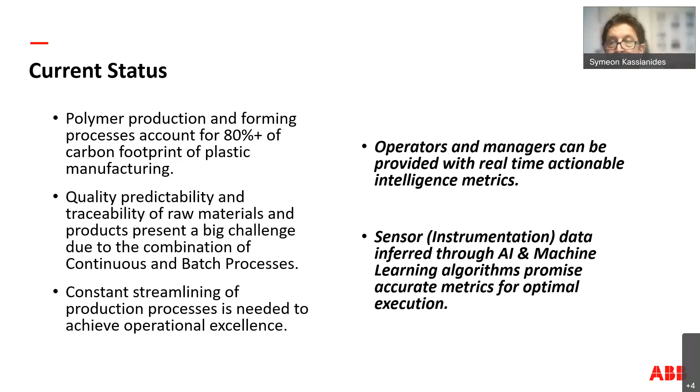A second challenge comes from the fact that polymer production can be a combination of continuous and batch processes, and this makes quality predictability and raw material tracking and traceability a big challenge, which in turn makes achieving and maintaining operational excellence difficult. However, as we will show, it is possible to provide real-time actionable information that can lead to sustainable operational excellence. I'll now turn it on to Symon, and Symon, please, I'll go on mute and you can continue from here.

Thank you, Symeon. So let us now look at the challenges that face the polymer industry. As we said, this is a continuous process with some batch aspects. The real-time tracking of material, both in terms of what is in the product and where it is now within the process as it moves along the equipment, followed by the quality being tracked in real time.

The issue being, if we detect a problem early on in the process, such as in reactor 2, in 2 hours time, where is it now? It will be somewhere along the production stream, but where? The next issue is detailed product history, which covers what is in the product and the details of when and where it was made during the process.

And then we have the predictability of quality during grade transitions. Obviously, this helps speed up the transitions between different grades and reduce the production of off-spec material or transitional material.

We then can move into the time characteristics. Because of the nature of the process, it takes hours to go through the reactors and then hours to produce enough to fill a batch. So a batch might typically take 8 hours or more.

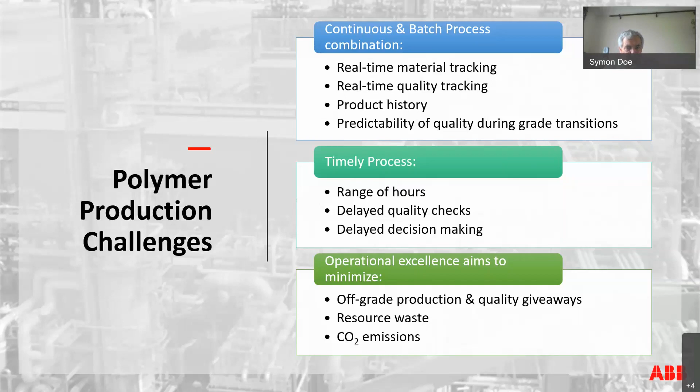Current solutions do not directly address the challenges outlined earlier. Solutions can be created but require excessive custom development. The exact nature of this varies depending on the chosen platform.

A classic problem with quality testing is that the results are delayed while the lab performs the tests, and sometimes by an hour or more, as we illustrated earlier. And this impacts the decision-making process. As the bulk of the process is continuous, if a quality issue is detected at an early stage, there is no visibility of where the affected material is an hour, 2 hours, or 3 hours later.

The technology has grown out of knowledge and experience gained from projects executed over the last 18 years. The solution is not specific to polymers and can be applied to industries with similar process behavior. To make the technology easy to apply to different processes and working practices, it has been created using standard components that can be arranged to cover most requirements. Custom models can be easily added to handle specific requirements.

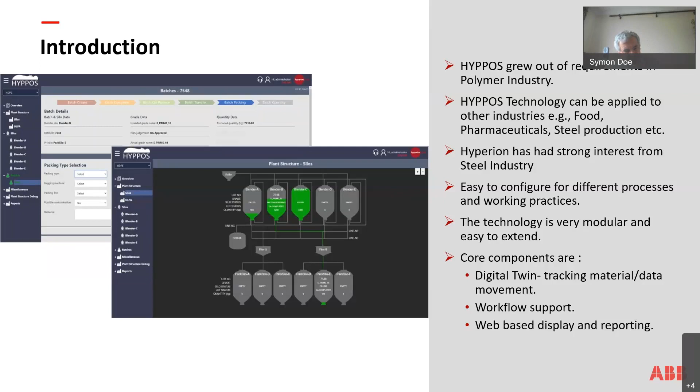The HYPPOS system is composed of 3 main modules, which are the digital twin, which tracks the material in the plant, the workflow, which automates procedures and background tasks, and finally the web-based displays and reporting.

So HYPPOS is positioned within Industry 4.0 as a deep tech decision support tool within the tactical management level. And it collects data from systems at the transactional management level, from the plant, controls values, etc. Feeds and receives data from systems at the strategical level, e.g. SAP, and coexists and interacts with other systems such as LIMS at the same level.

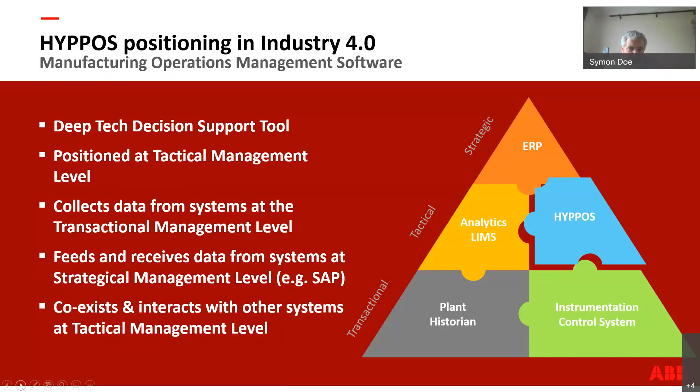We now look at each of the components of HYPPOS, starting with the digital twin. This replicates the main process equipment, delays, holdups, and material movements driven by measurements from the plant.

As the material moves through the process, it can be tagged with quality and other information as it passes instruments and sensors, so it carries that along with it.

The software maintains a detailed history of all movements of material between vessels and into the final product, allowing creation of detailed reports of how and when the product was made.

The digital twin is constructed from blocks that replicate the main equipment as shown in a PFD, and by then adding the live process value tags from the plant.

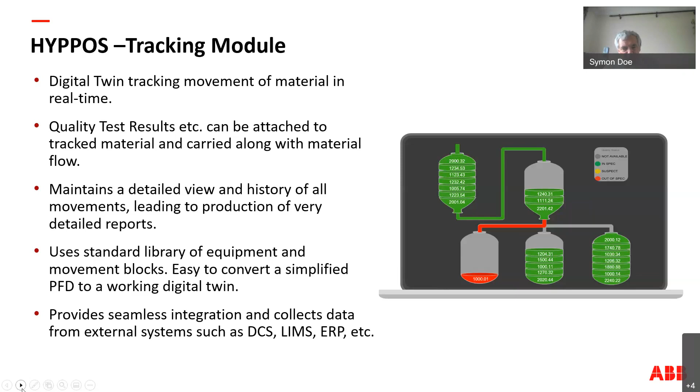The second active component is the workflow module. This implements the interactive workflows for standard operating procedures, as well as automating background monitoring tasks to detect and action specific events. The workflow typically executes a sequence of steps, transitioning to the next based on specific conditions.

When the workflow interacts with operators, the screens are only visible to the operators with specific roles, so nobody is distracted by something that's not relevant.

A real workflow, unlike the one illustrated, has more paths to handle non-standard operating situations, and typically these will require approval steps to allow the operation to proceed.

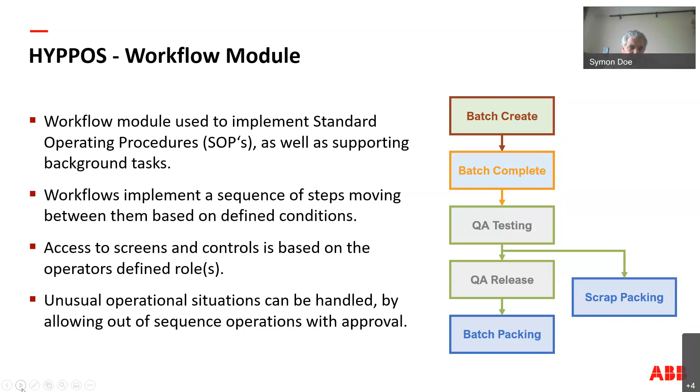The reporting module converts the collected information and presents it in meaningful forms for each role. The module includes 8 standard report groups, which can cover different time periods - daily, weekly, monthly, yearly, etc. - giving a total of 40 or more different reports. Additional reports can easily be added to cover any plant-specific requirements.

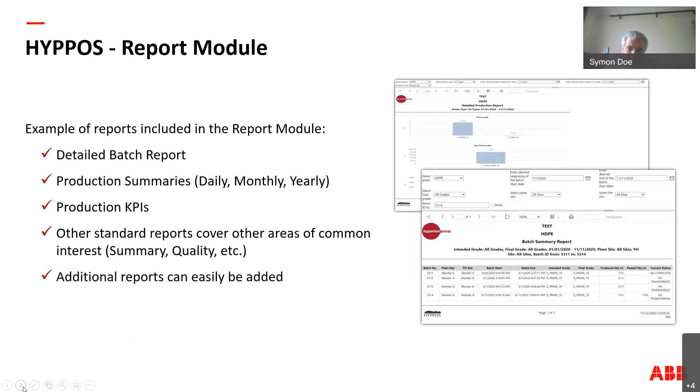The benefits of HYPPOS are that it collects data from multiple sources, extends it using the digital twin, and creates a single unified view of the process that can aid the decision-making process.

To summarize: it improves the decision-making process by giving visibility of critical information, concentrates fragmented data from multiple sources and provides a single overall view, improves collaboration and efficiency, improves product quality monitoring and plant operations visibility into raw material consumption, addresses regulatory concerns by providing traceability, and leads to higher yield in less time, leading to higher profit margins.

Which leads on to you, Symeon. Yep, thank you, Symon.

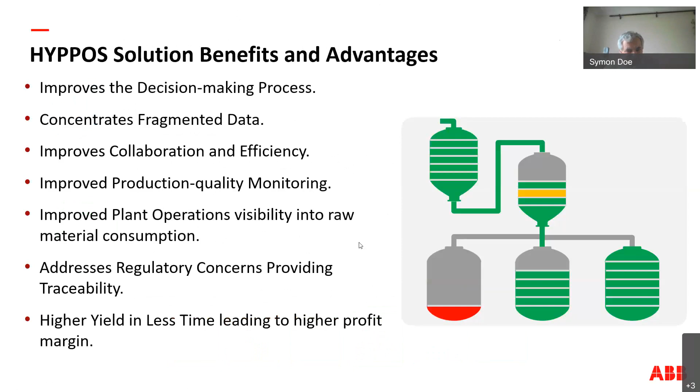Okay, so to summarize and bring all these points together in discussion, I think we're focusing on how digitalization can benefit polymer production. We've seen in practice that manufacturers can increase differentiation and competitiveness, and achieve significant efficiencies and cost reductions.

I would like to refer to a recently published report indicating benefits of up to 20% reduction in batch cycle and 40% reduction in product release time. Last but not least, digitalization can help plants achieve their sustainability targets.

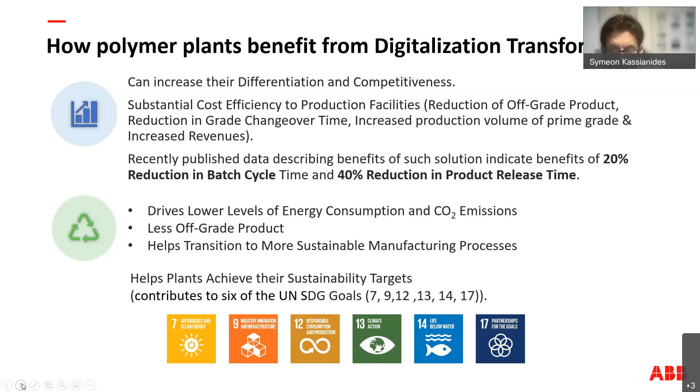We all like to look at numbers, so just as a teaser to get everybody thinking of the magnitude of the potential benefits of using technology such as this: in the event of recovering 1,000 tons of off-grade material at a cost of 1,500 euro per ton - and that might be an outdated number - the material cost saving would amount to 1.5 million euro per year. In a plant of 250 or 300,000 tons, you understand the impact of such efficiencies.

On top of that, we have carbon pricing, which is an additional benefit. The reduction of greenhouse gas emissions from improved operations can improve the ESG score and rating of the company.

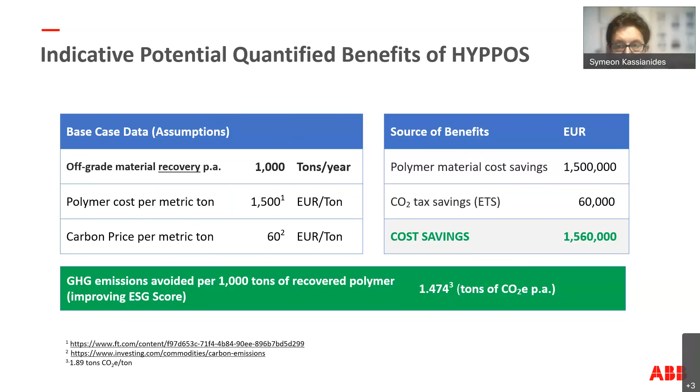With this, I will introduce and pass on to Nikos Perperis, the polypropylene production manager of Hellenic Petroleum, for his part of the presentation. Nikos, the floor is yours.

Can you hear me? Yes, we can hear you now. Okay. Sorry, but there was a problem with my connection. I hope that I was not...

Let me first introduce, to those who may not know, the group Hellenic Petroleum. Hellenic Petroleum is a dynamic group, the biggest in the country, having a leading position in the Greek energy sector, as well as in the greater area of Southeastern Europe.

The group's range of activities includes supply, refining, and trading of petroleum products, both in Greece and abroad, fuels marketing, petrochemicals production and trading, oil and gas exploration and production, power generation and natural gas, renewable energy sources, and provision of consulting and engineering services to projects related to hydrocarbons.

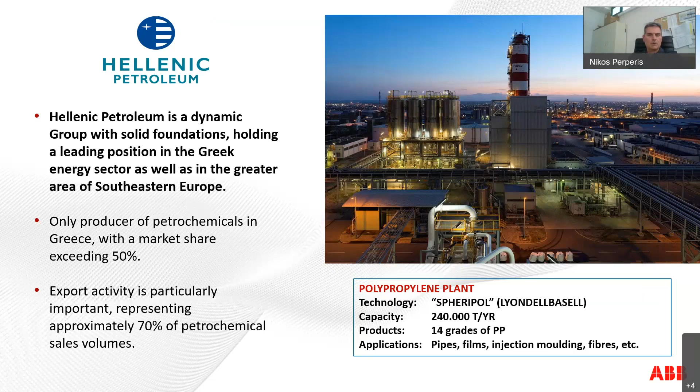As we all know and experience, the fourth industrial revolution has already invaded our lives and transformed businesses worldwide using the advantages of modern technology. HELPE, of course, as a leading company, could not stay away from this transformation and has adopted numerous actions that you see in the list shown in this page. Some of these actions are completed and already run, some are still in progress.

The Hyperion HYPPOS solution was piloted and has since been deployed at the polypropylene plant, and it is one of the main actions for the digital transformation of the polypropylene plant. Next page, please.

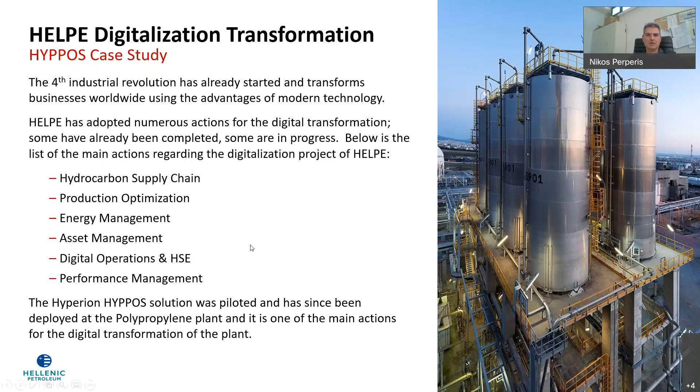The beta testing, installation, and launching partner. Hyperion selected HELPE as the launching partner for HYPPOS due to the high suitability of the Thessaloniki plant, the opportune geographical proximity, as well as the long and historically successful cooperation between the two organizations. Configuration and installation was completed 100% remotely, and this is very important for Hyperion, due to the COVID-19 pandemic outbreak. The beta testing was successfully completed between May and June 2020, 2 years ago.

Since July 2020, HYPPOS is connected to the real-time plant data management system, collecting data from the PP production line to track production batches in real time and produce the associated reports. But what is all this job for? Just show a bit the previous page, please, Symon.

Okay. As we can see in the lower right part of the page, the plant has one extruder line, 6 blenders, 4 bagging silos, and 23 silos dedicated to bulk product. Why is this so important? This is connected to the benefits of HYPPOS to our plant. Now we can go on with the next page, please.

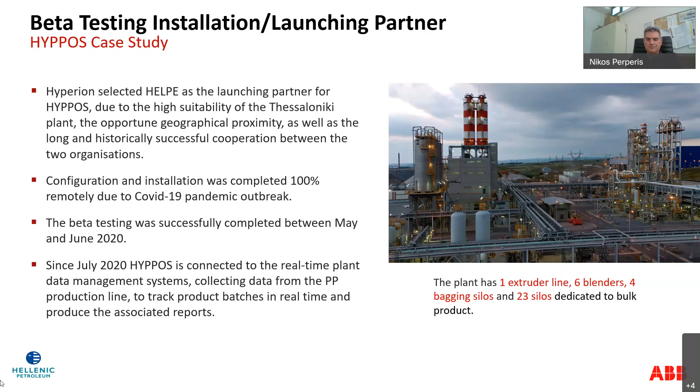Here we are at the benefits. We will see some of the benefits, although we will be able to see and detect them in the following pages. So let's explain first that the plant has 2 distinct separated areas, the reactors area and the area of the extruder and then the silos that we have seen before. In both areas, the process is continuous, but it is at the extruder area and after it that the separation of the batches takes place. So this is what was said before, that it is the integration between a continuous and a batch process. And this is the main benefit that we can have from HYPPOS.

So all continuous production history, reactor and extruder areas, the 2 areas that we have just said, is now associated with the final batch product in real time and available online. It offers a single consolidated source of information within a specific product batch, spanning across the full production cycle, continuous and batch. Through the provided material tracking, it enables the immediate troubleshooting of production issues and the investigation of any customer complaints and claims.

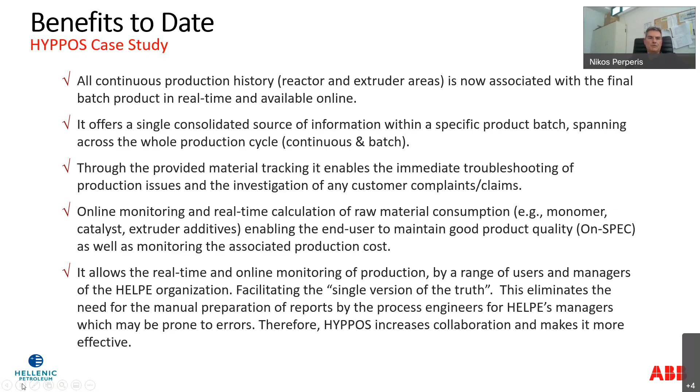Let's go on now to see the reporting. Here we can see some of the reports that HYPPOS can prepare for the plant. As a matter of fact, we have to tell that we are still developing HYPPOS, and every day we have a new idea. Every day with the colleagues in Hyperion, we can add new reports according to our needs and according to what we want to draw from the plant and from the system.

The first one that we see is the batch summary report, which is the most important, I would say, because we have all the details from the production of the batch. The same for the second one, the detailed batch report. The additive report, where we can see if all the additives to the extruder area have been added correctly, which is very important for the final quality of the product. So it eliminates off-spec product.

The grade daily report, quality reports, scrap details report, scrap monthly report, downgrade report, production KPIs. This is very useful as well for the managers at all levels, so that they can see our KPIs. And the final detailed production report, which is quite rich in items that we would like to see. Okay, Symon.

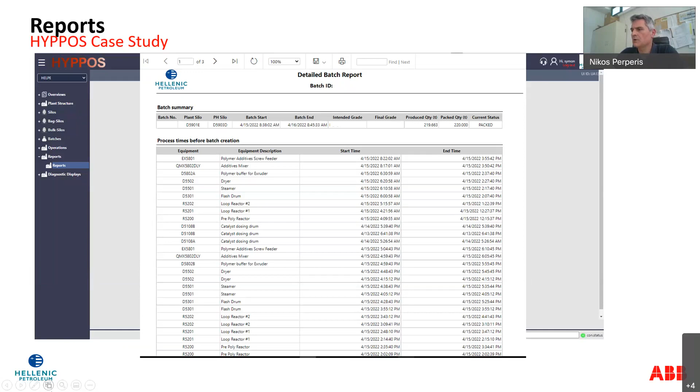Yes. And there we can see where finally this batch has gone. We can see the silo that was dedicated for this batch, and in the lower table the several materials and additives and their quantities. From here, we can have a very good picture of the quality of this batch, and in case something hasn't been added correctly, we can see it during the production of this batch, which is very important, of course,

because as we said, one of the benefits, and maybe the most important, is that we can detect any mistake during the production, something that goes wrong during the process, in real time. So having all this info, we can rearrange and fix our parameters in order to go on having an on-spec product.

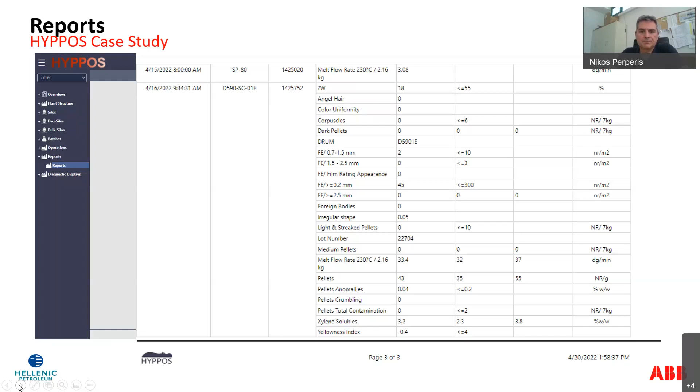Here are the main quality parameters that we have to check to decide if the final product of a batch is on spec or not. As I said before, and I repeat again and again, this is something that we can control during the production of a lot. And this is just the final report. These are all the parameters that our lab can check to give the certificate for a batch. Okay.

So I have already said that every day we think of new things and we add new items in Hyperion, in HYPPOS. So we have already planned some extra work for the future. And as a matter of fact, there are some ideas that I haven't yet referred to Hyperion. So it means that we will go on with our collaboration. Let's see some of our future plans.

Test and implement machine learning algorithms for the prediction of MFR, melt flow rate, melt flow index, where online polymer analyzers are not present. MFR is one of the main parameters that we have to check for our product, so it is very important. This will allow the online monitoring of quality during the production process, enhancing decision support.

Integration of HYPPOS with the SAP system. This is also something that will eliminate a lot of the time that we spend in several programs. Expand the HYPPOS scope to cover the supply chain, from the orders of product and raw material to post-delivery and distribution to end customers. Integration of HYPPOS with the orders, warehouse management, sales and logistics systems to achieve a complete and integrated ERP environment.

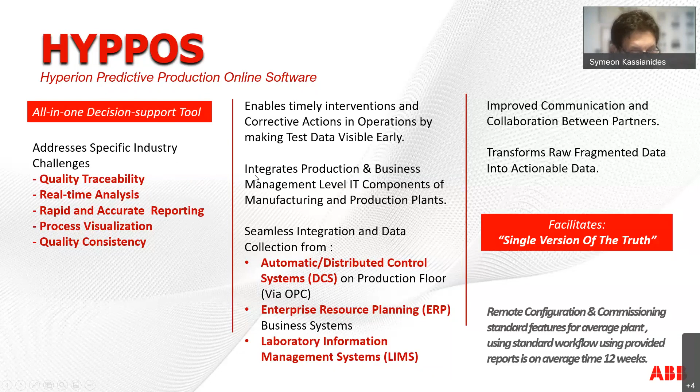So in the closing section, we would like to introduce the current HYPPOS related activity for enhancing the abilities of the system. We recognize that in a number of facilities, the availability of instrumentation, especially for online polymer analyzers, is not as widespread as may be thought. So in order to have online quality predictions in real time and be able to take even further actions, we decided to explore developing machine learning algorithms that could lead to soft sensors that can infer process readings in the polymer process in the absence of instrumentation.

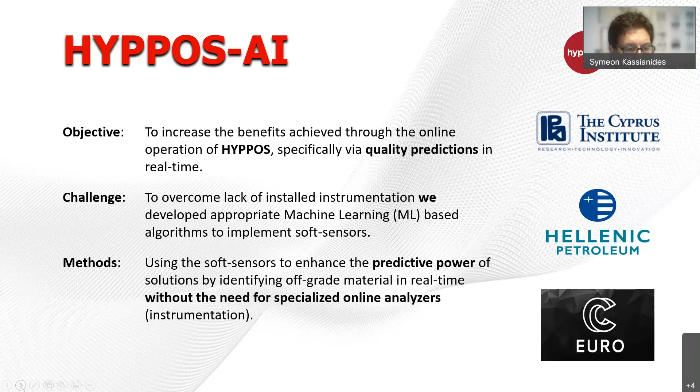We worked on the backbone of using data from the polymer plant of Hellenic Petroleum, and we worked with the Cyprus Institute under the EuroCC framework for high performance computing in order to develop this technology. Our findings are very encouraging, and we're coming close to the possibility of trying, as Nikos mentioned before, to put it online and start testing. And with that, I'll pass on to Symon to say a couple of words. Symon, over to you.

Thank you. So as we've just said, last year we completed the research into predicting the quality indicator parameter MFR from live process data. We've chosen the machine learning approach over a dynamic model, as it's going to adapt automatically to aging processes and changing of catalysts and other parameters. The dynamic model approach keeps needing to be retuned, so that's not very appropriate.

For this project, MFR prediction was for the base polymer as it exits the reactor stage. We didn't look at the post extruder. The research trialed many different AI and machine learning approaches, and the idea was to identify the most appropriate of these techniques. If we move on to the next slide, Symeon.